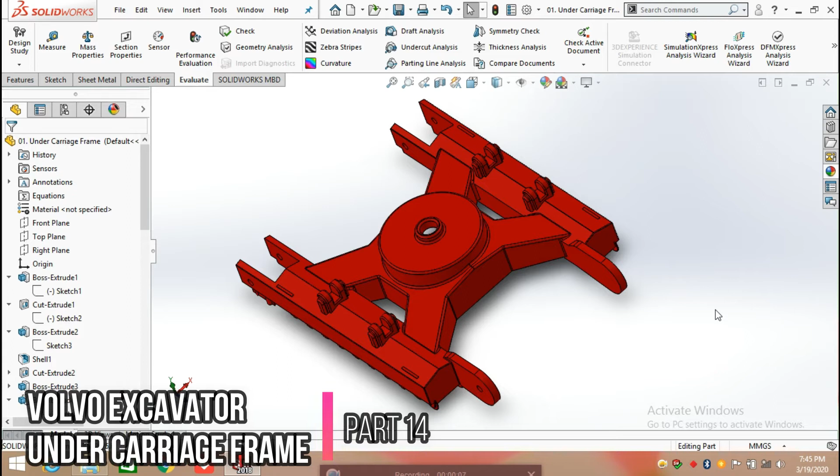Hello everyone, in this video we are going to create the undercarriage frame used in a Volvo excavator. So here I already have created its part. In this video I am going to show you the features used to create this and the sketch of this part. So let's begin with the first one.

The feature is extrude boss. So I am rolling back all the commands and starting from the first one. For this we choose any plane, front plane, top plane or right plane. I am going to create a sketch here.

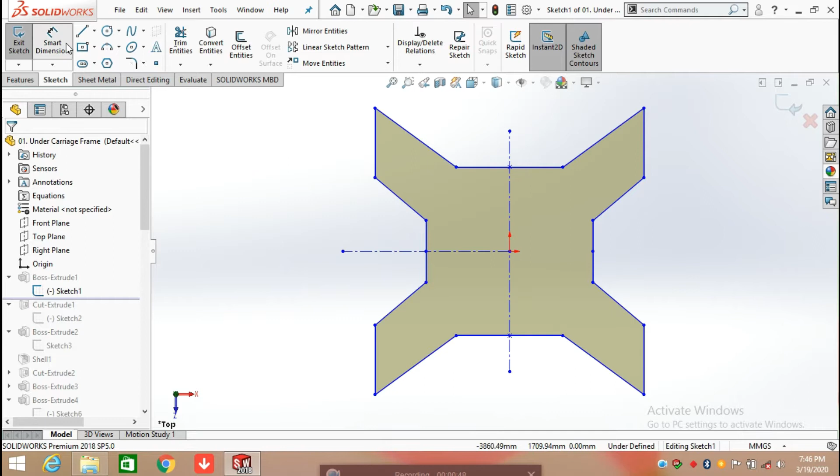First of all, draw a center line from the origin, make it a construction line. After that, draw a center line. Now draw a straight line which has a length of 1150 mm, and add the relation between the line center point and origin, making them vertical.

After that, again draw a line which has a length of 875 mm at an angle. Now defining its angle with the previous line, click on the first line and second line. Now defining its angle, which is 144 degrees.

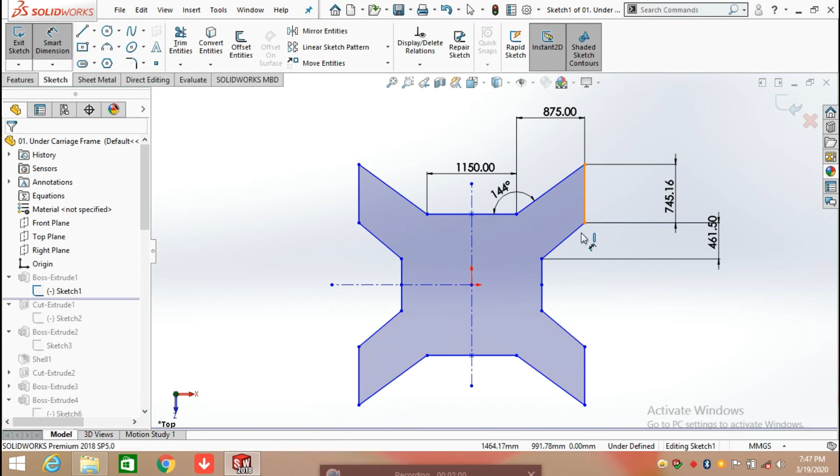Now draw a straight line from this edge which is 745.16 mm, perpendicular to this point. Now again draw a line at an angle which is 461.50 mm. Now defining the angle between these two lines, which is 230 degrees.

Now draw a line perpendicular to the previous line, which is 329.06 mm. After that, we use mirror on this sketch. So click on mirror entities and select these entities, and mirror it above this line to create this half section of the sketch.

After that, one section is completed. Now again click on mirror entities and select these outlines and mirror them above the center construction line, which helps save time in creating the sketch. Now the sketch is completed.

After that, click on feature and select the extrude boss command. Now we are going to extrude boss this sketch. So select blind direction in the upward direction and extrude it up to 610 mm, and click OK.

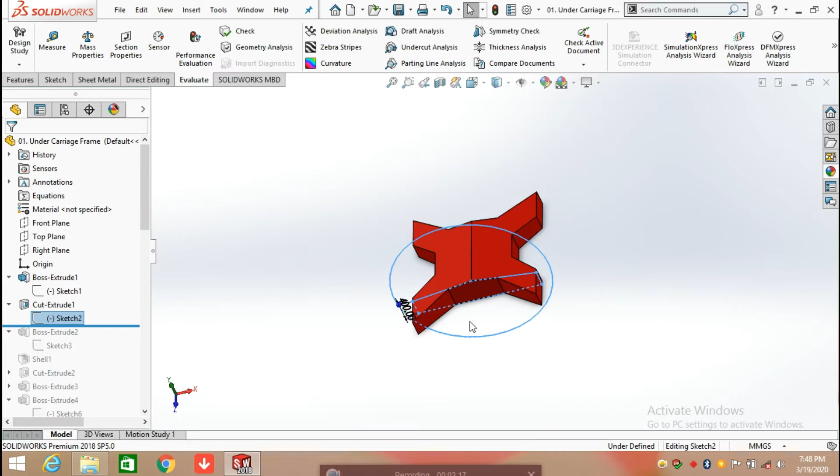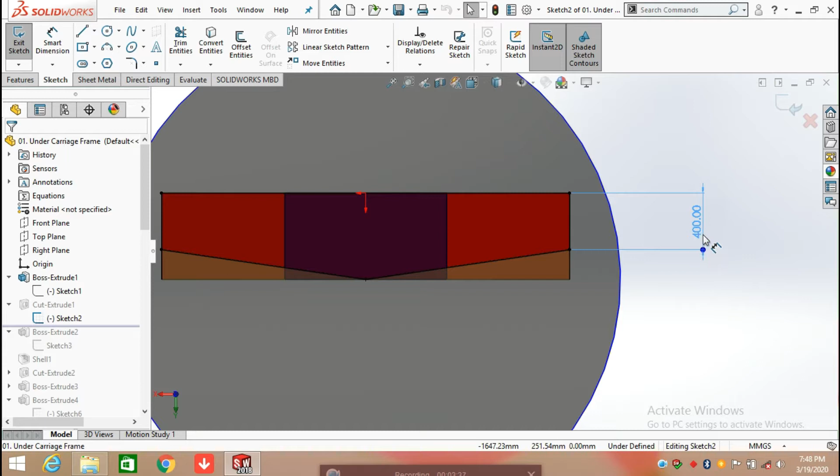Now we are going to apply extrude cut. For this, here again we create a sketch. Okay, so first of all, click on the line command and draw a straight line edge to edge, making a line in the vertical direction which has a length of 400 mm. Now continue with the line command and draw another line.

This line is 1450 mm, and the angle between these two lines is 261.76 degrees. Make the same line in another section, or you can mirror the sketch by drawing the center construction line, selecting mirror entities, and mirroring the half section.

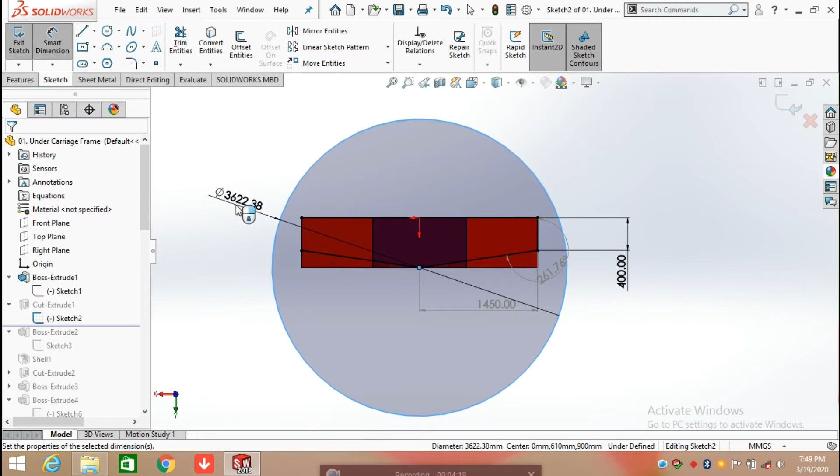After that, draw a circle here, defining its diameter - you can roughly draw a circle. After that, select the extrude cut command. The sketch is created on this plane. For this, you simply need to click on the plane and click on sketch.

Now we are going to apply extrude cut. Click on feature and select the extrude cut command, and here select through in both directions. Select direction 1 and direction 2, and select through all the body. Click OK.

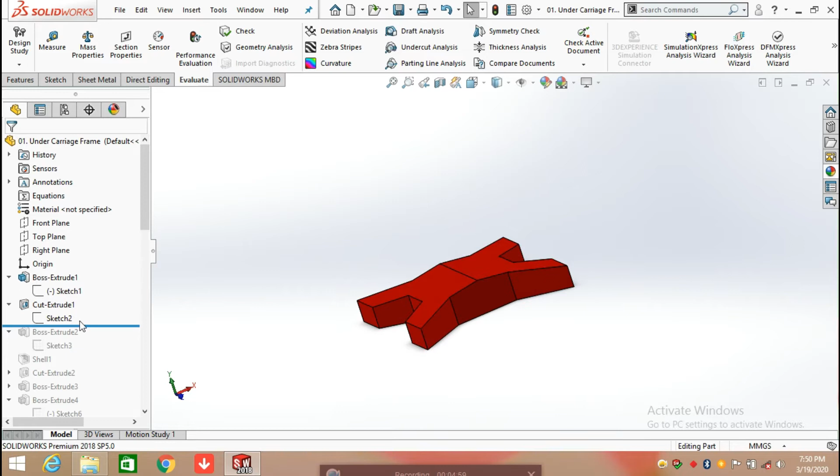After that, we are going to extrude boss. So for this, select this plane, just click on the face, click on sketch, select the circle command, and draw a circle at the origin which has a diameter of 1600 mm.

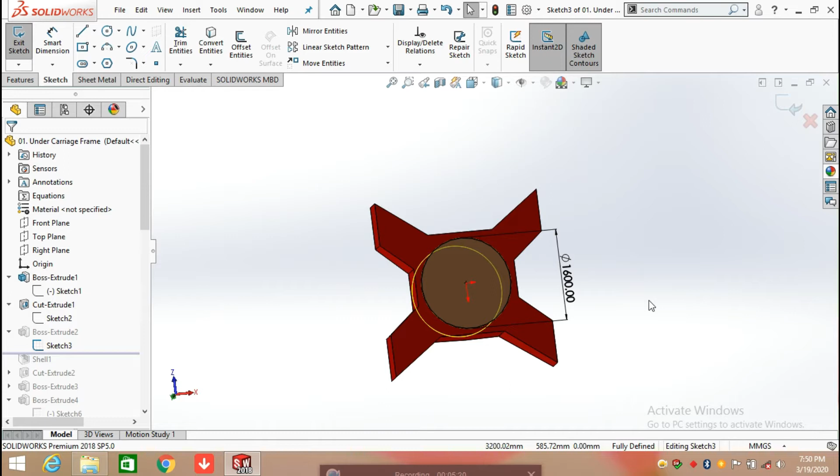After that, click on feature and select extrude boss, and extrude it up to a distance of 830 mm.

Now we need to shell the body, so click on feature and select the shell command. Here we need to select the face, so we select the bottom side and enter the thickness, which is 50 mm. Click show preview - you can see the preview in yellow. Click OK.

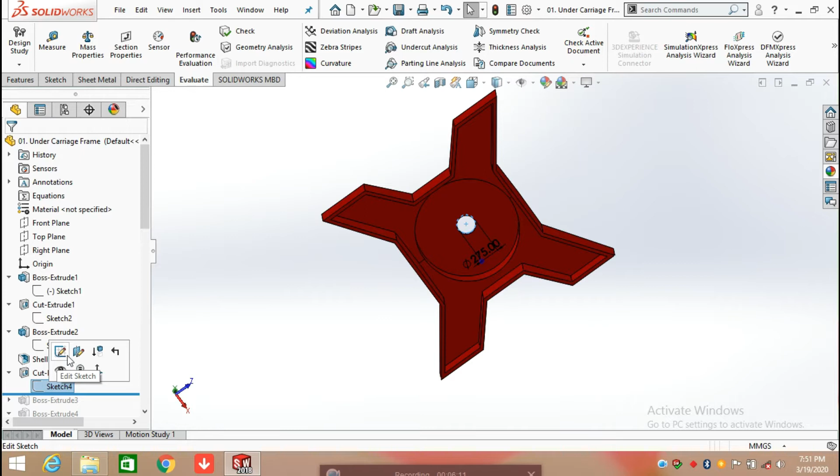After that, again we are going to apply an extrude cut. So for this, draw a circle at the origin which has a diameter of 275 mm, and extrude the cut throughout.

Now again draw a circle at the origin, defining its diameter which is 417 mm, and the inner circle has a diameter of 275 mm. After that, click on feature and again select extrude boss, and extrude it up to 118.50 mm.

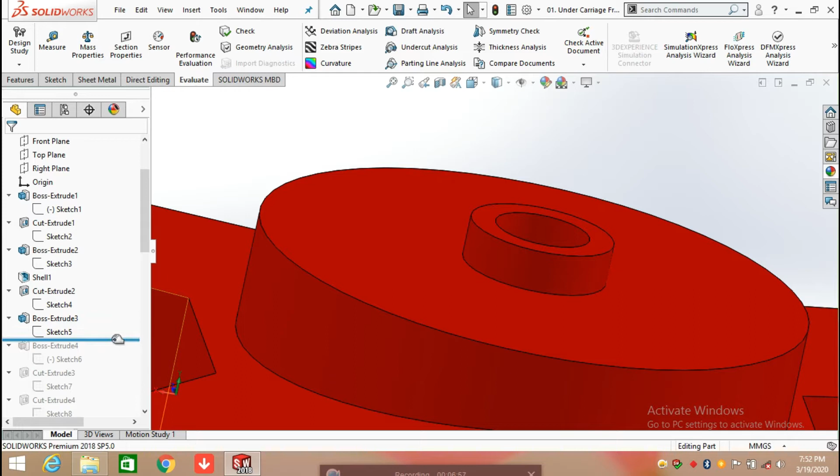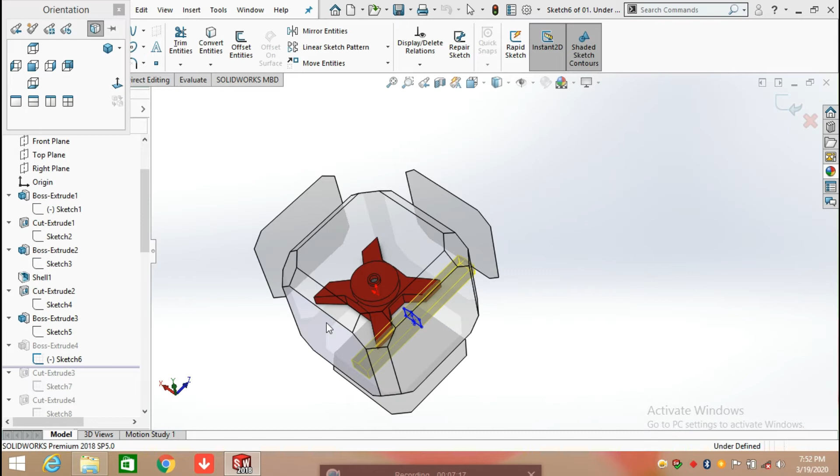Now we are going to again create a sketch here. For this, we need to select the front plane and click on sketch, and here I'm going to create a sketch. First of all, draw a center line and define its distance from the origin, which is 1600 mm. Now simply click on the line command and draw a straight line which is 350 mm.

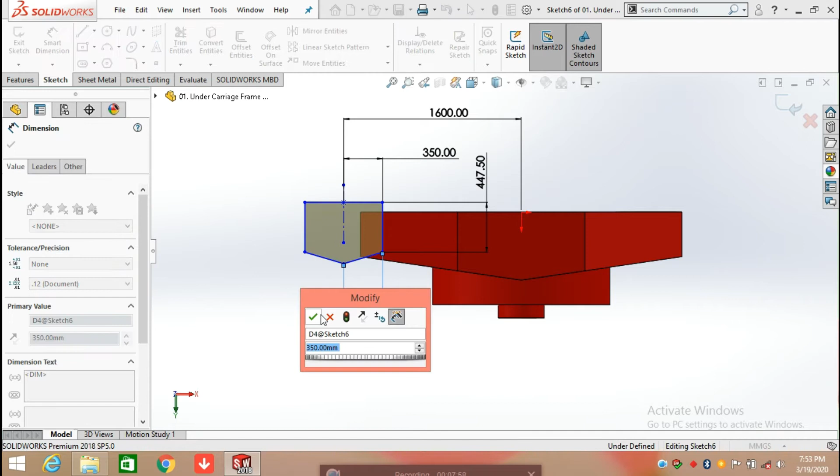Again draw a line perpendicular to it which is 447.50 mm. Now draw a rough sketch, a line having 350 mm. After drawing it, we need to define its angle, so click on the first line and second line and define its angle, which is 253.68 degrees.

After that, again click on mirror command and select the half section and mirror it above the center line, and click OK.

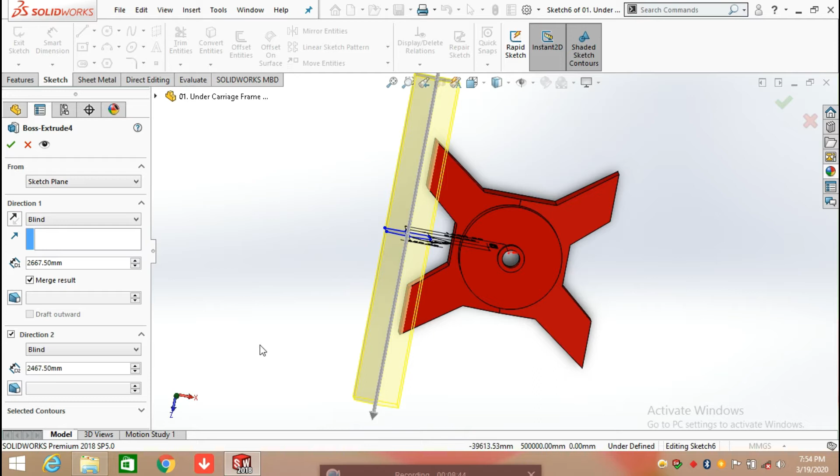Now click on feature and again select extrude boss. Now extrude it from the sketch plane, which is 2667.50, and select direction 2. In direction 2, we extrude it both up to 2467.50 mm. Now click OK.

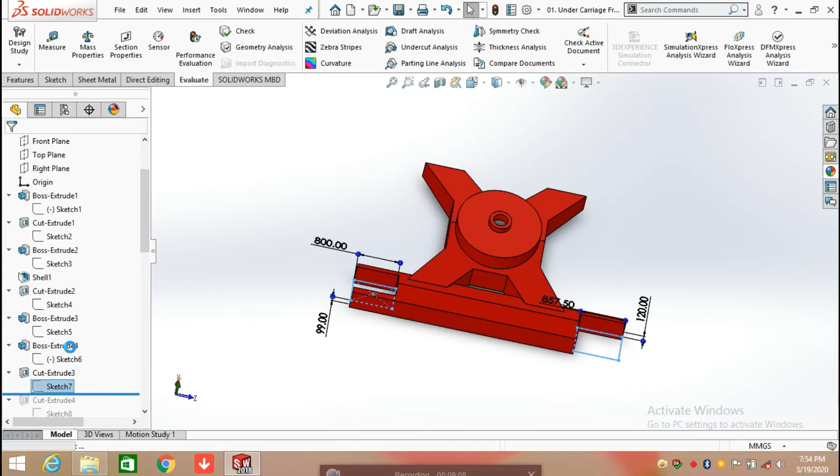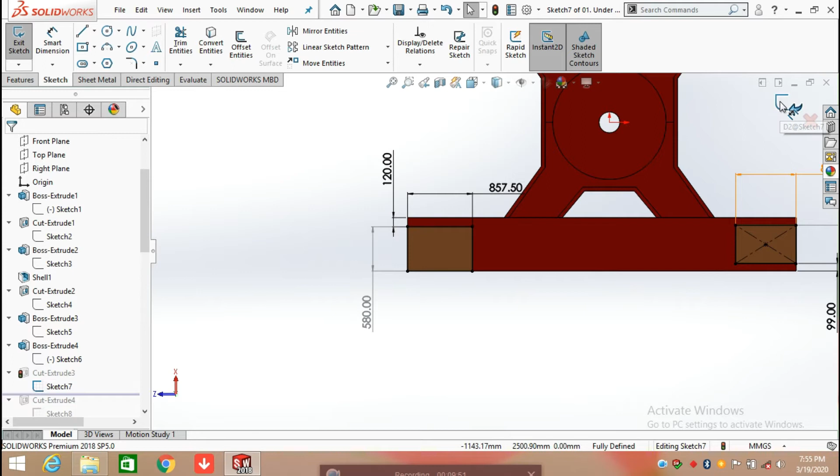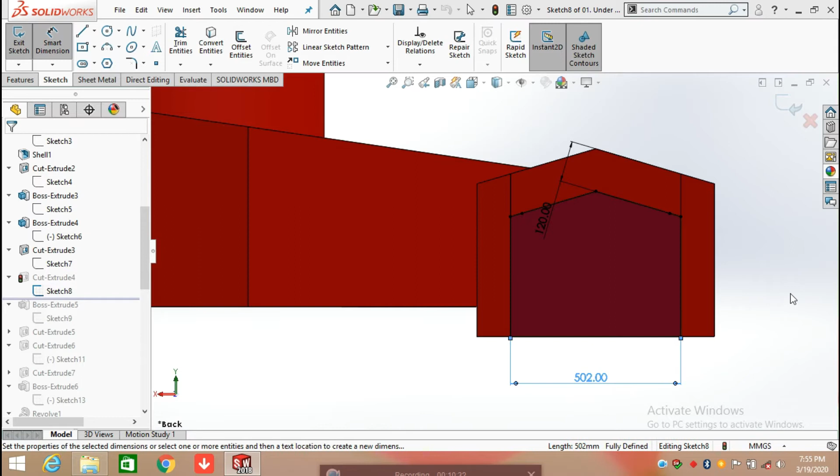Now here we are again going to apply extrude cut. For this, select the face and again click on sketch and simply draw a rough sketch, defining its dimension. This is 502 mm, and after that draw a straight line which is 351.45. Now defining its length from the upper edge, which is 120 mm. Defining the angle between these two lines, which is 253.68 degrees.

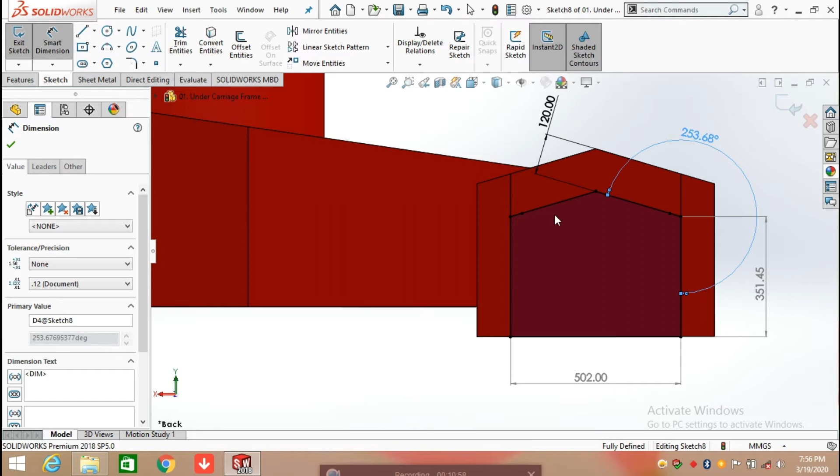Now simply draw a center line on the midpoint, and again click on mirror entities, and from here select entities which you want to mirror. So here I have selected these entities and mirror it above the center construction line. After that, click on extrude cut command and extrude cut.

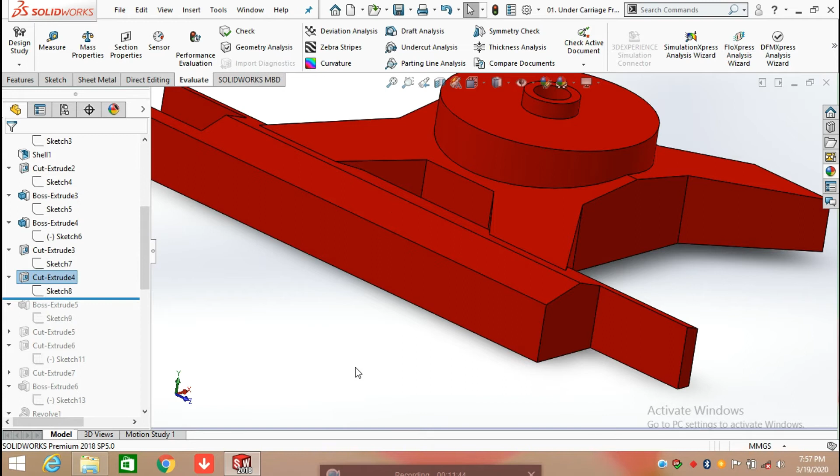Select offset from here, 60 mm offset from this face. After that, again select offset from the surface, so select this one and enter distance 60 mm and click OK. You can check it in evaluate from measure. Click this face and this face, showing thickness is 60 mm on both sides.

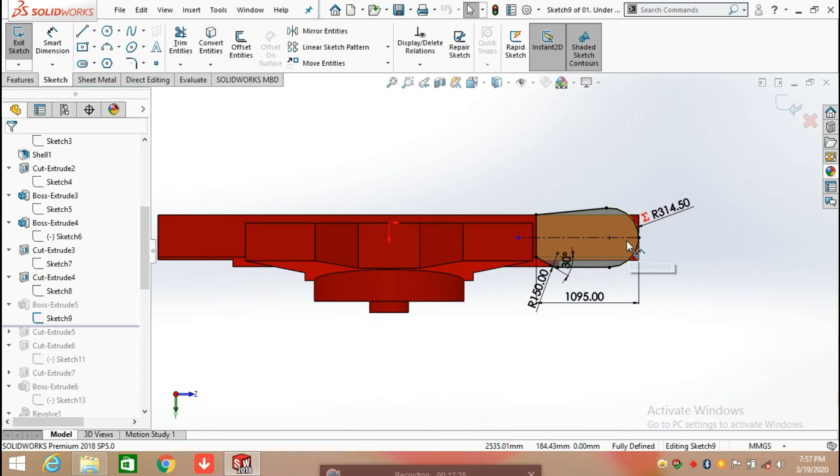Now we are going to make another sketch. For this, click on this one face and click on sketch, and start from the center line. So draw a center line from this edge. With the help of line command, draw the half one sketch. The total length of the line is 1095 mm.

After that, draw a line having length 152.81. Now defining the angle between these two lines, which is 30 degrees. After that, click on arc and draw an arc having radius 150 mm. Now draw a straight line, it is 552.69.

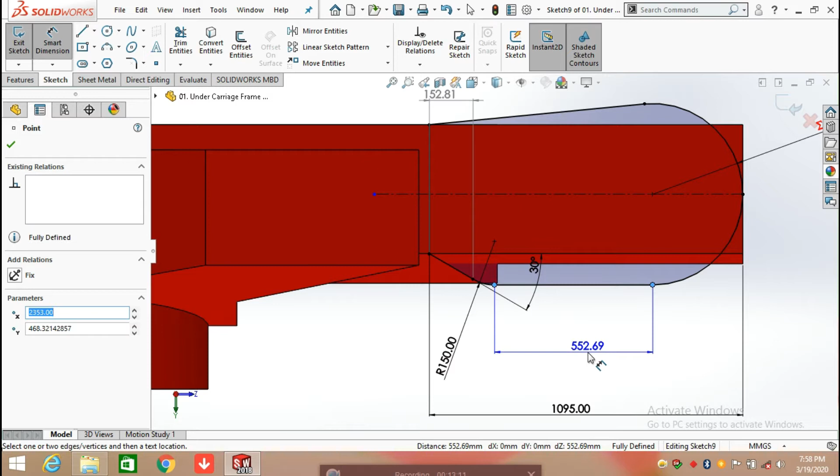Now again select arc and draw an arc here which is 314.50 to this point. Now again click on mirror entities and mirror half the sketch above the center line and click OK. After that, select extrude boss. Now here we select up to surface, so we need to select this face and click OK.

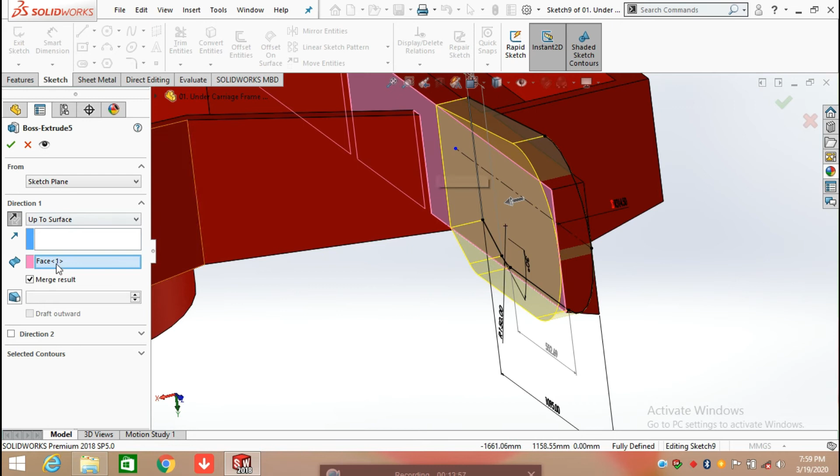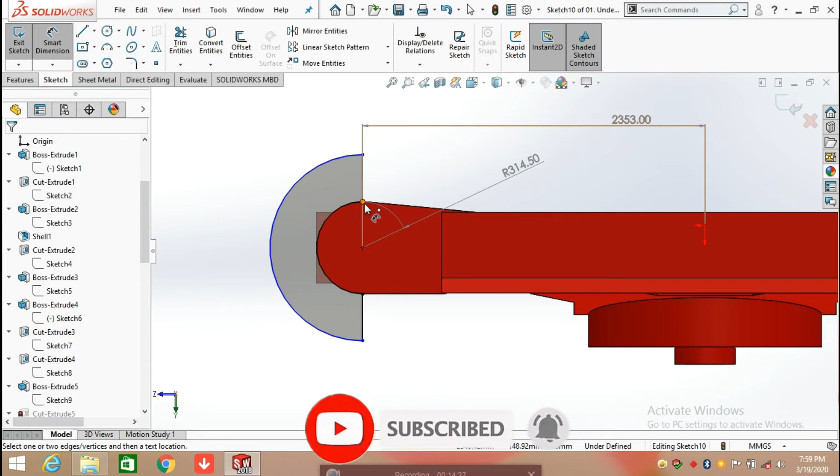Now we are going to extrude cut the extra face from here. For this, click on this face and draw an arc here having radius 314.50. Now defining its distance from the origin, which is 2353 mm. Now draw a straight line from edge, and the outer radius is 634.68 from the same origin. After that, click on feature and extrude cut to all.

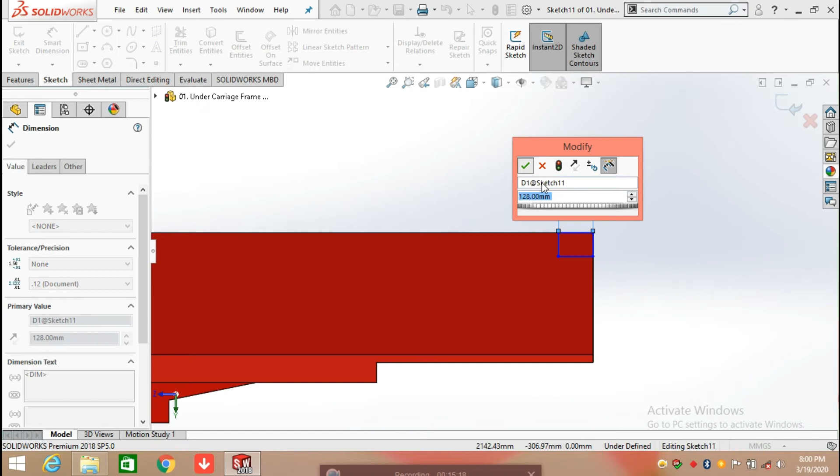Now here we again extrude cut on this face. Select this face and draw a rectangle here from the edge. You can select corner rectangle and simply draw a rectangle here, which is 128 mm, and having width 87.50, and select feature and extrude cut to all the body.

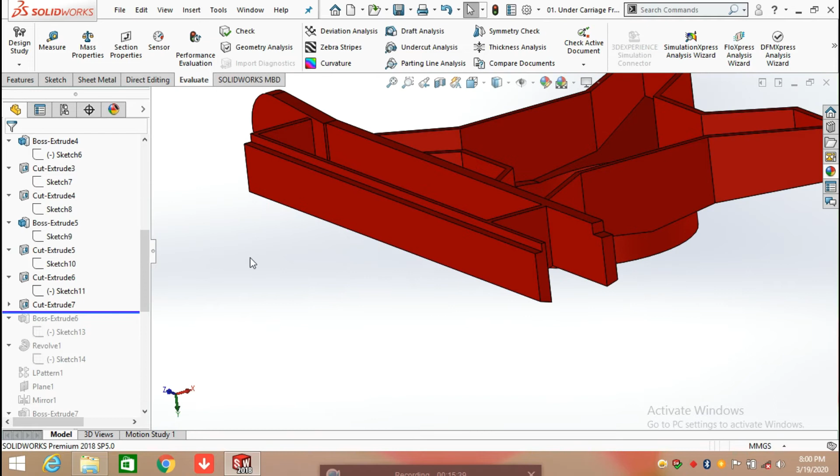Here we again apply extrude cut. For this, select this face and click on sketch. And again draw a corner rectangle, defining its length and width, which is 65 by 65, and extrude cut through all in this direction.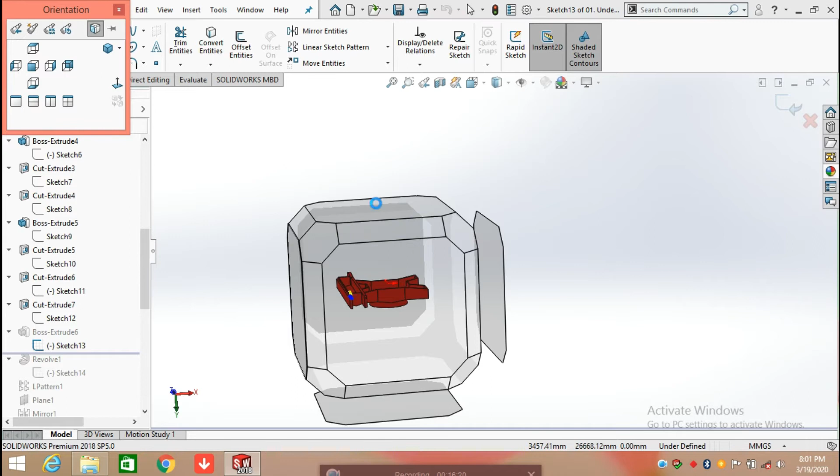Now we are going to extrude boss. For this, click on this face and click on sketch. Now here I am going to define the sketch with the help of Smart Dimension. First of all, simply draw a straight line from reference of this edge. Now defining the distance from the edge, which is 100 mm. Now defining the length of this line, that is 339.20 mm.

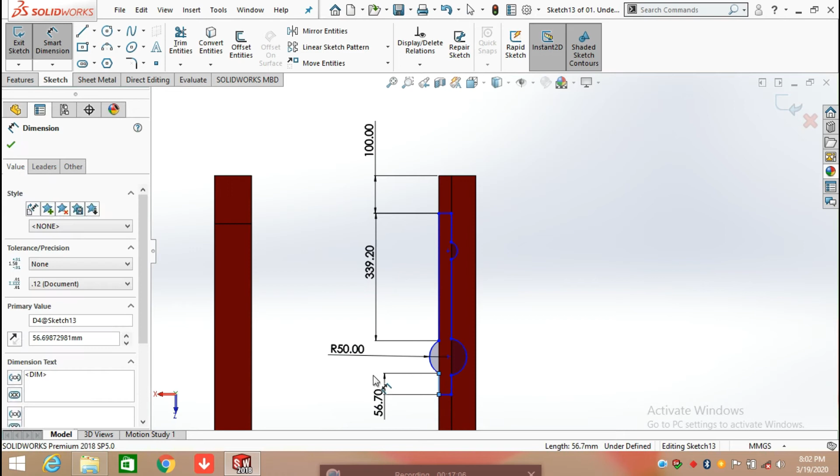Now select arc command and draw an arc here having radius 50 mm. Continue with the line command, draw a line with the reference of this edge of the body, it is 56.70. Again draw a line perpendicular to it, which is 34 mm. Again draw a straight line, which is 50.82.

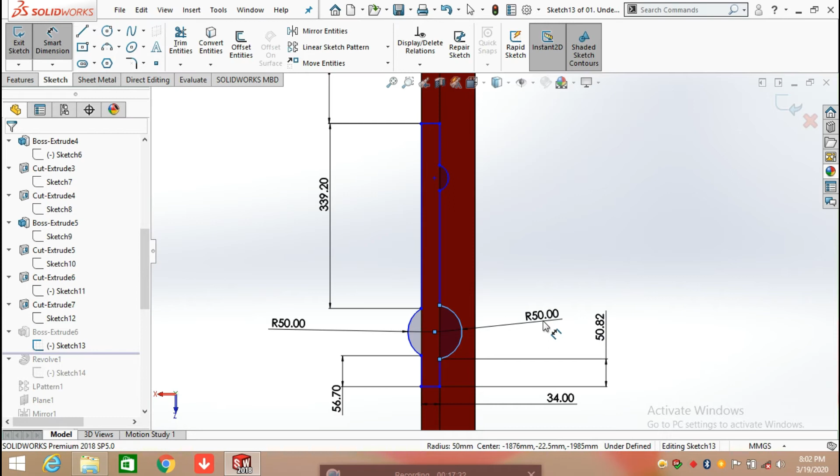Now again click on arc command and again draw an arc here, defining the radius, which is 50 mm. Now draw a straight line from this point, this is 209.99, approx 210 mm. Again click on arc command and draw an arc here having radius 35 mm. Now close this sketch with the help of line command. This is 76.88 mm.

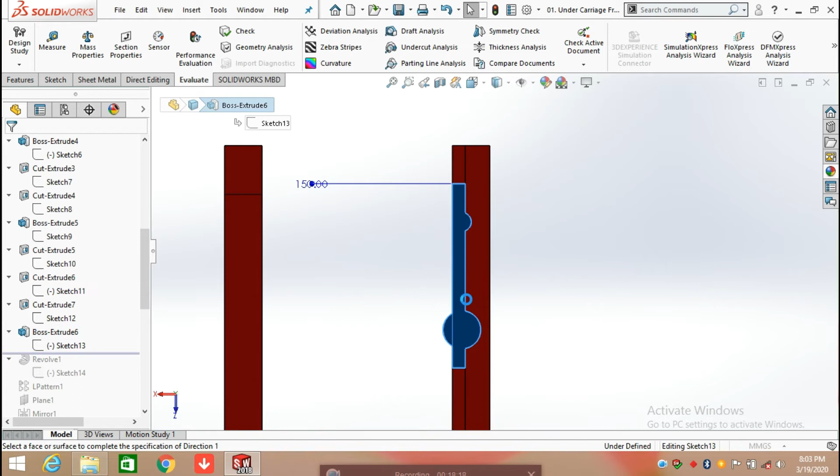Defining the width of this line, which is 34 mm. After that, click on feature and select extrude boss command and extrude it both. From here we select offset from the surface and selecting this one face, and enter distance 150 mm and select reverse offset and click OK.

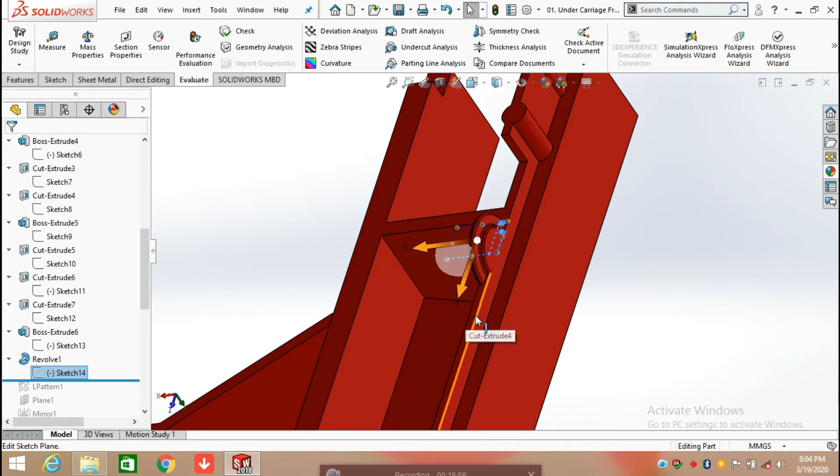Now we are here to apply revolve base command. For this we need to create the sketch on this face. So select this face, keep it in normal position, and click on sketch.

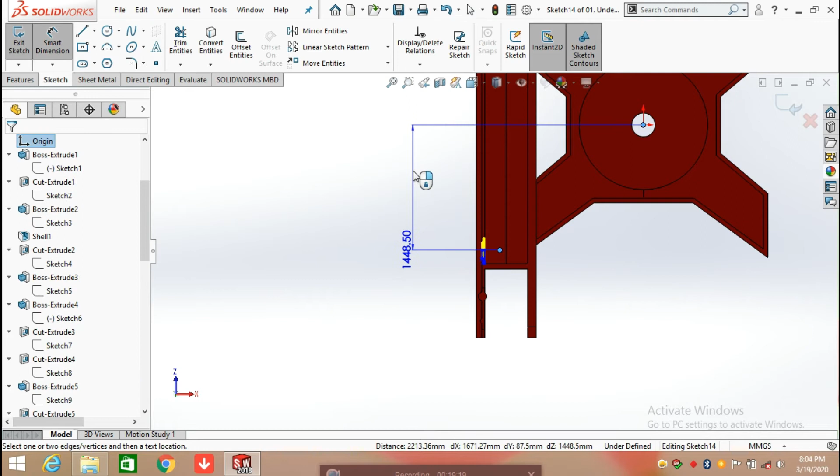Draw a sketch here. First select the line command and select construction line, defining the distance of this construction line from the center of the origin, which is 1448.50 mm. Now defining another dimension, draw a straight line having length 142 mm.

Now select arc command and draw an arc having radius value 8 mm, and draw a straight line from the end point of the arc, which is 3.50 mm, and make this line tangent to the arc.

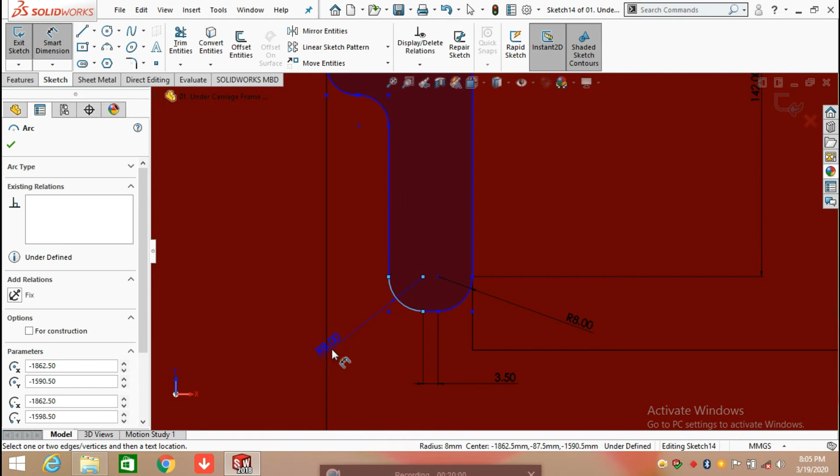Continue with the arc command, again draw an arc which is 8 mm. Now draw a straight line that is 35 mm.

Again select arc command and draw an arc here, having 7 mm radius. After that, draw a little line which is 0.50 mm.

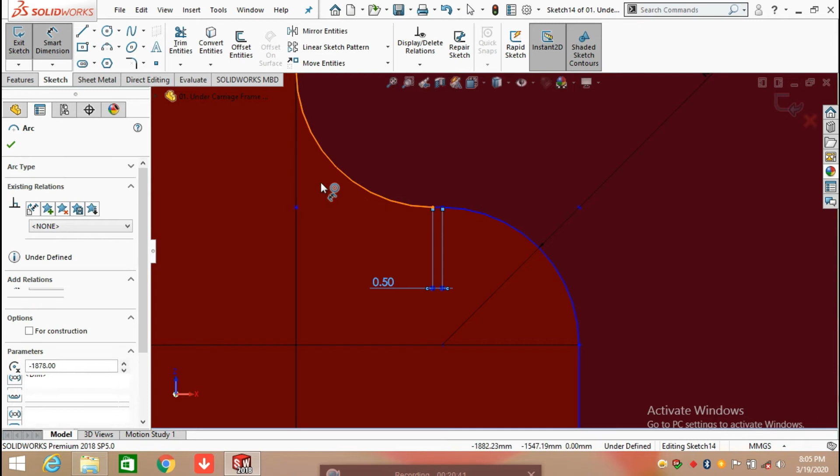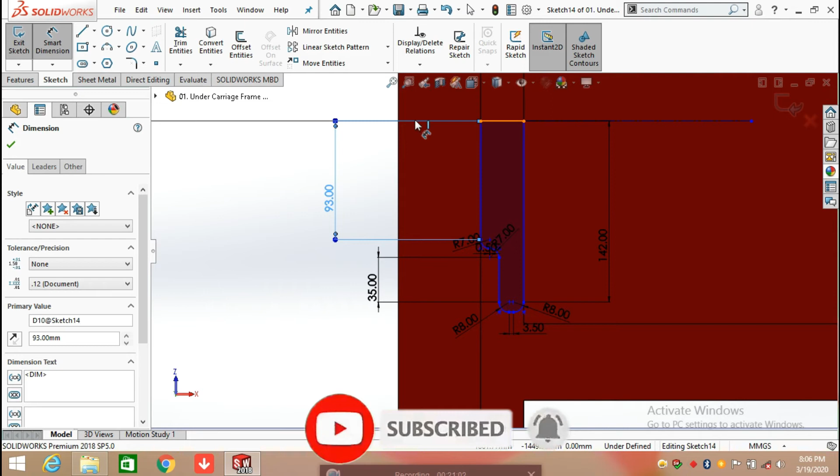Again click on arc command and draw an arc here which is 7 mm. Now close this sketch with the help of line command, that is 93 mm, and click OK. Now defining the width of this line which is 3.50 mm.

After that, click on feature and select revolved boss/base and revolve this sketch with reference of the center line. You can check it from here. Now I'm going to revolve this sketch with the reference of this construction line and click OK after 360 degree.

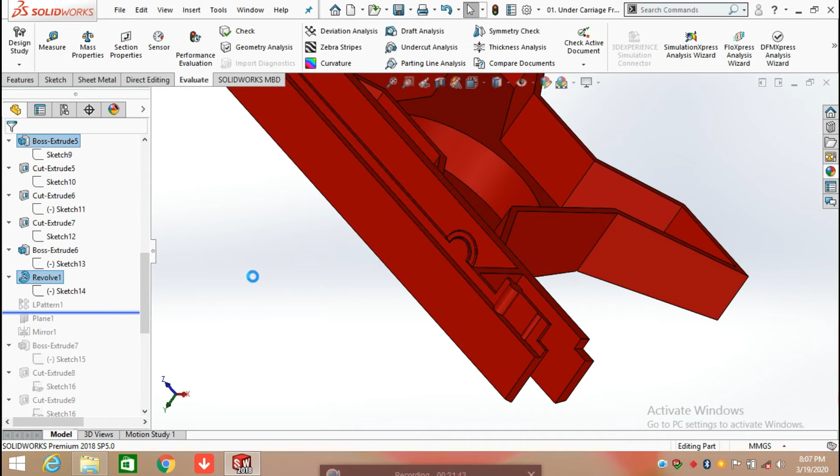Now we are going to pattern it. Click on feature and select linear pattern. Select the features or faces which you want to pattern. Here we select revolve, and for direction we select this one edge. Now number of items here is 10, and distance between each is 350 mm. After that, click OK.

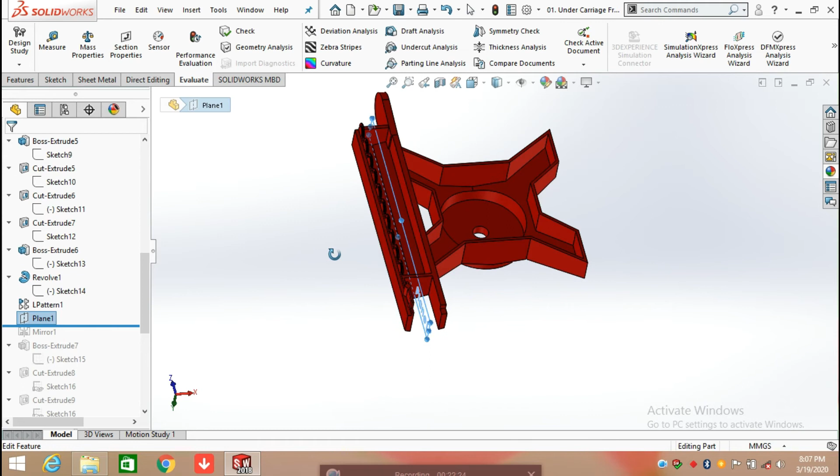Now here we need to choose a plane. Click on feature and select reference geometry. Here we are creating the plane between these two faces, so select first face and second face, and the plane is created here.

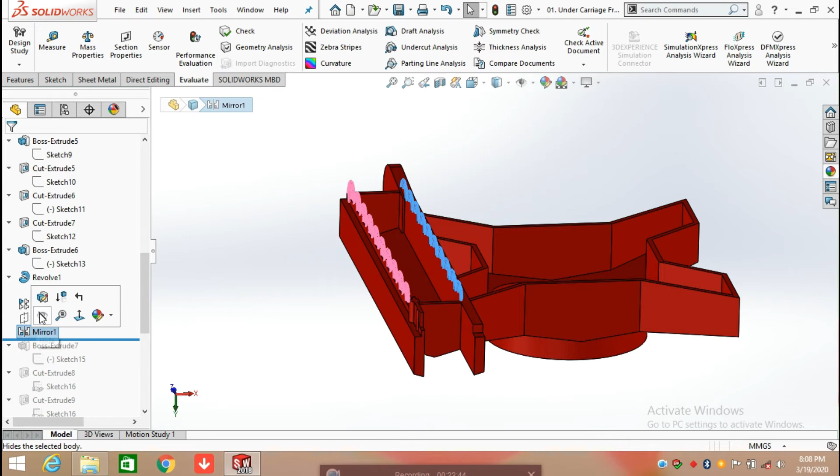Now we are going to mirror the linear pattern. Click on feature and select mirror command and select the feature which we want to mirror. Select linear pattern and revolve, and the face or plane which you want to mirror about. So select plane 1 and mirror it about plane 1. Click OK.

Now we are going to extrude boss again, this one part. So select front plane again, and I'm going to create a sketch here. Keep this sketch in normal position and start from the center line.

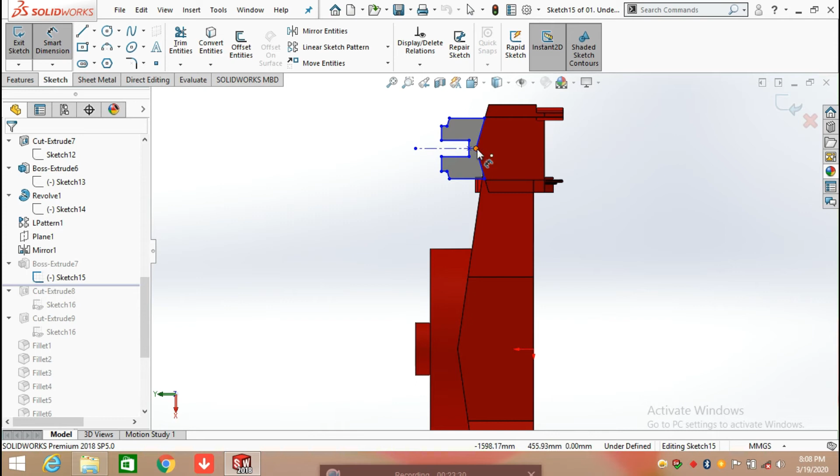After that, draw a line with reference to the edge of the body, having length 241.50 mm. Now draw a straight line from the end point of this line, which is 284.51 mm. Now again draw a line having length 60.50 mm.

Now defining the angle between these two lines, click on first line and second line, which is 253.68 degree.

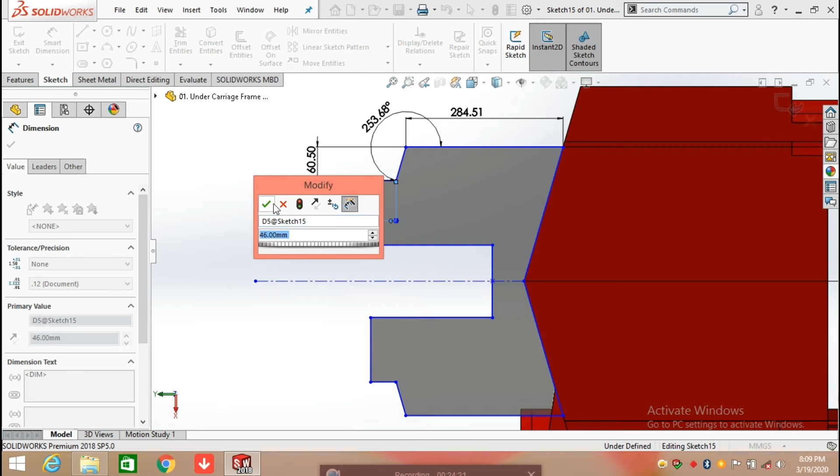Now draw a straight line, which is 46 mm. Again draw a line here, which is 116 mm, and click OK.

Continue with the line command. Again draw a line perpendicular to it, which is 220 mm. And join this line with the center line, which is 65 mm.

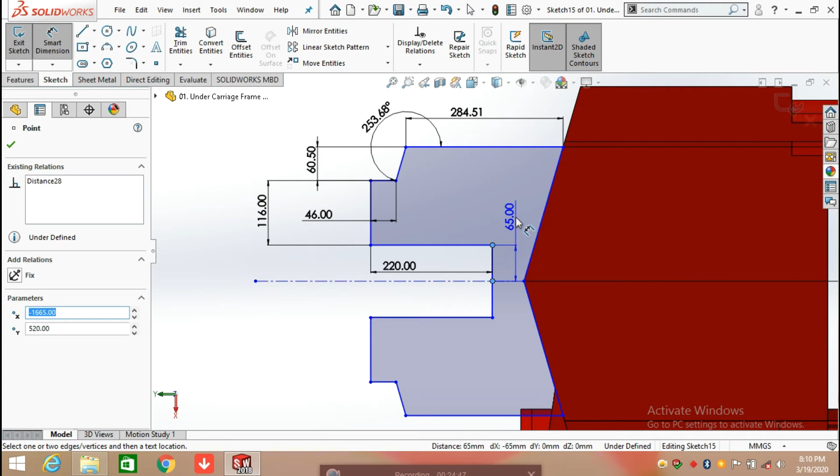Now again click on mirror entities and select all these entities and mirror it about the center construction line, and click OK. After that, click on feature and select extrude boss command. Select offset here and offset it 460 mm, and for that select direction blind, which is 233 mm, and click OK.

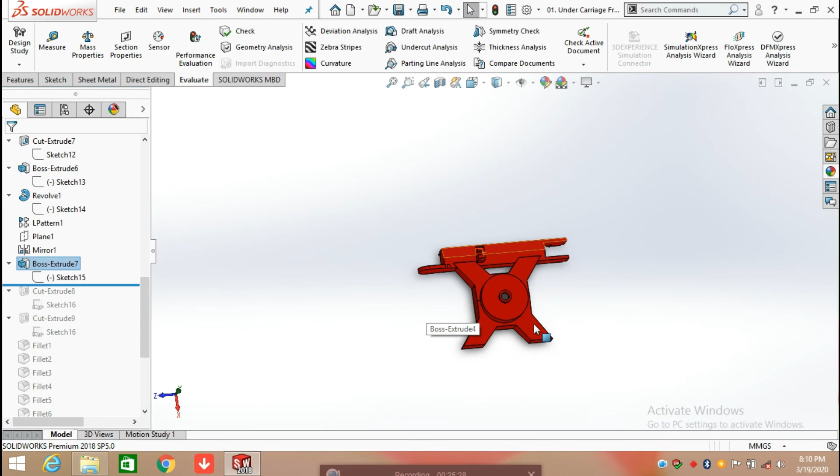Now here we again go to extrude cut. So for this, select this face, and here we are going to draw a sketch.

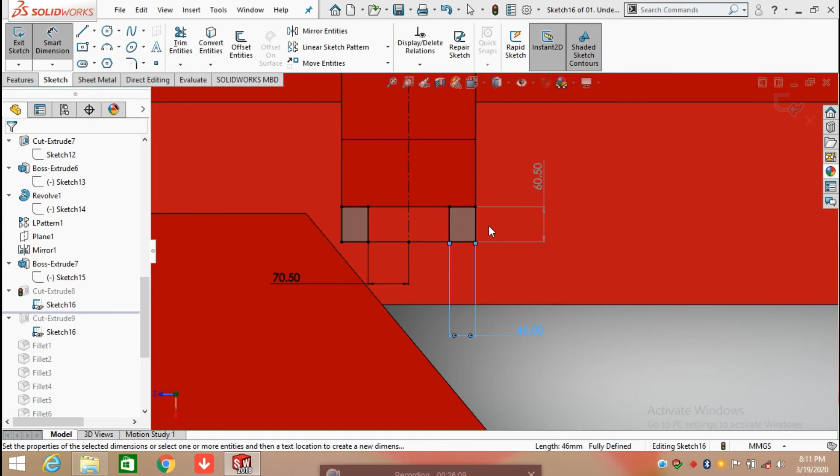Simply draw a rectangle and draw a center line from this point. Now defining the length and width of this corner rectangle, which is 60.50 mm. Now defining its width, which is 46 mm. Same in another direction, 46 mm and 60.50 mm.

Again select mirror entities and select both these two corner rectangles and mirror them about the center construction line. Now click on feature and select extrude cut.

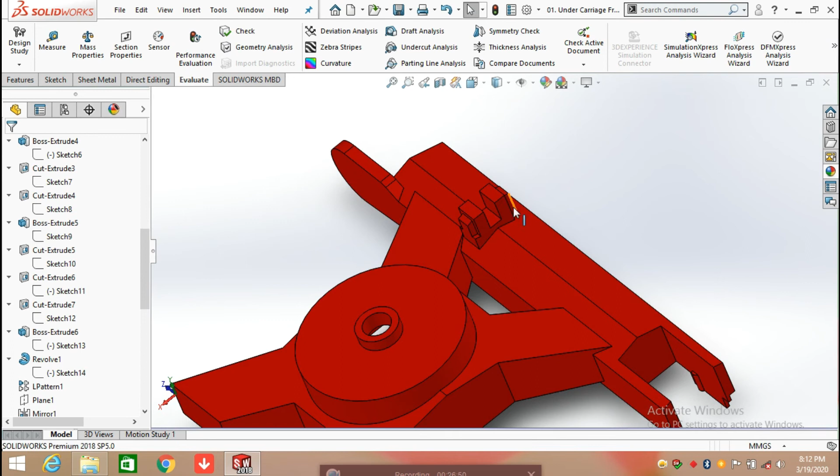From here we need to select up to surface. So for this we select this face and click OK. Now the extrude cut is applied up to this one surface.

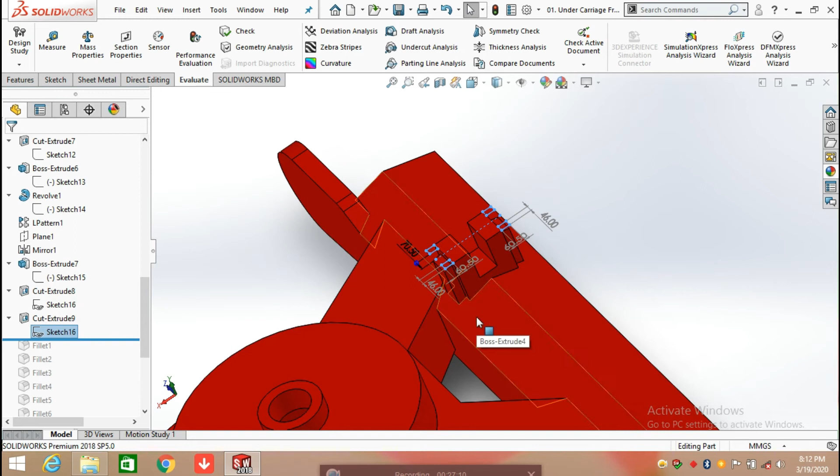Now again apply extrude cut, and this one we need again select up to surface and select this surface and extrude, cutting this sketch up to the surface.

Now we are going to apply fillets on these edges. Click on feature and select fillet command.

Here we apply face fillet. For face fillet we need to select three faces. So we select the first face and click, select the second face and click, and select the third face, and a full round fillet is applied. Click OK.

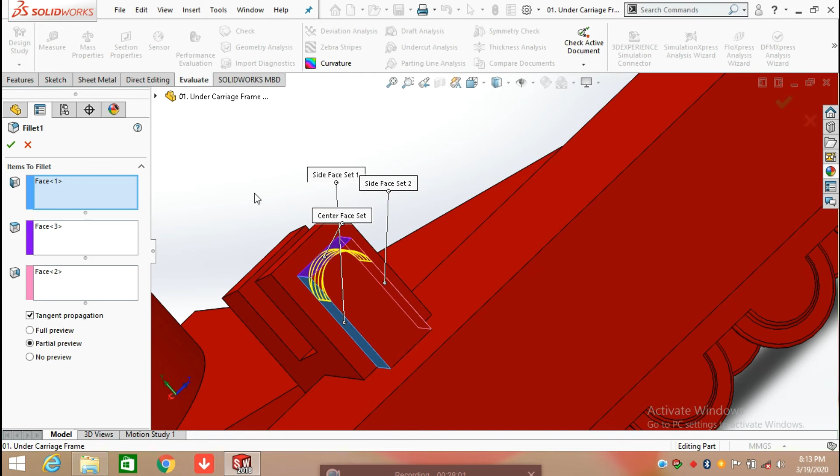Now getting the fillet command again. Again here we apply face fillet, so we need to select three faces simultaneously one by one and click OK. Repeating this command on these two edges again by applying face fillet.

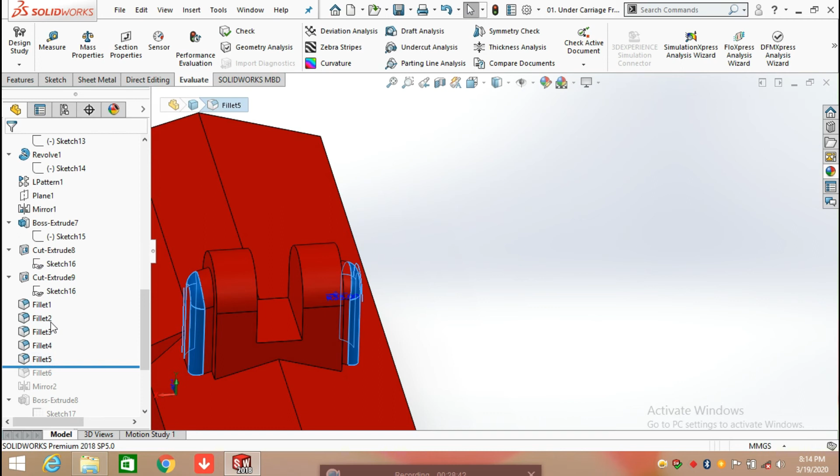Now again select fillet command. Here we apply edge fillet, which is having radius value 35 mm. So select the outer edges and click OK. You can see the changes here.

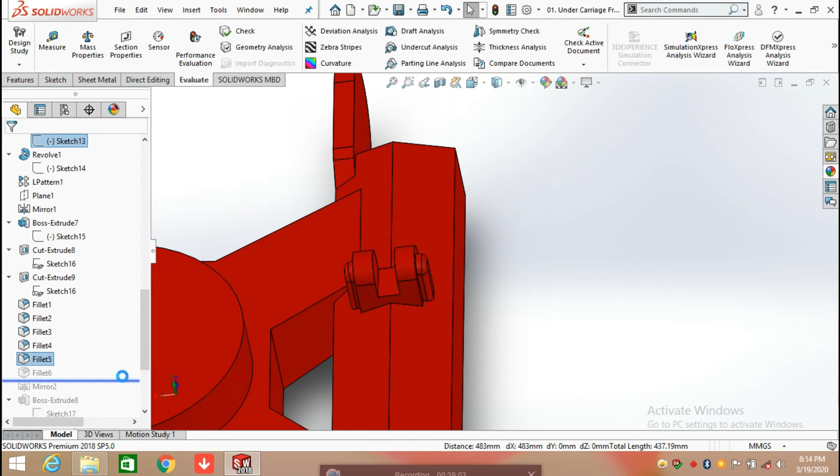Now again click on fillet command. The edges are shown here in blue color, and yellow color are the selected edges. Here we need to select 8 edges, which have a radius value of 20 mm. So select this one edge and the inner edge, and click OK. You can see the changes here. The fillet is applied on these edges having radius value 20 mm.

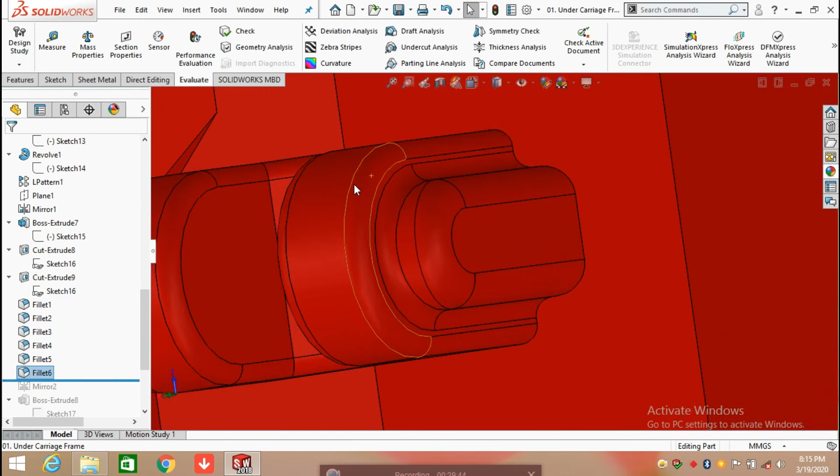Here again we are going to extrude boss.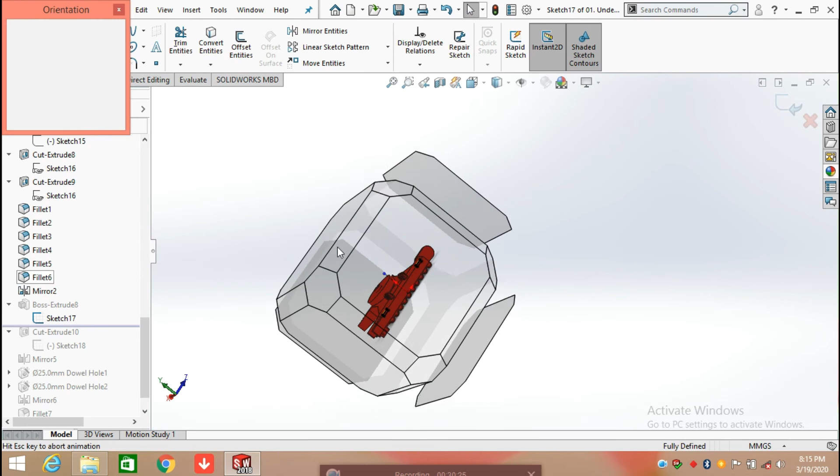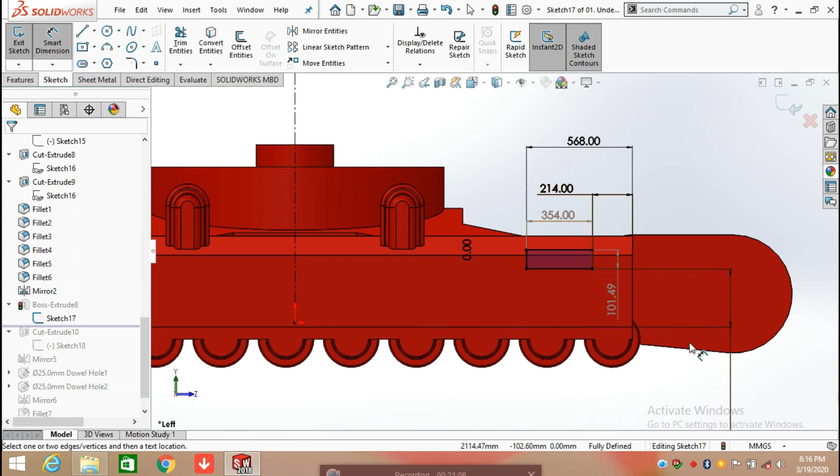Select the face and again draw a rectangle here, which has total length... click on smart dimension, defining length and width, which is 354 mm. Now defining its width, which is 101.49 mm. Now defining its distance from the edge, which is 214 mm, and from this side, which is 568 mm, and draw a center line from the origin and mirror the sketch. After that, click on feature and select extrude boss.

From here, select offset and make it offset at the distance of 59.50 mm from this face, and in direction 1 select up to next and click OK.

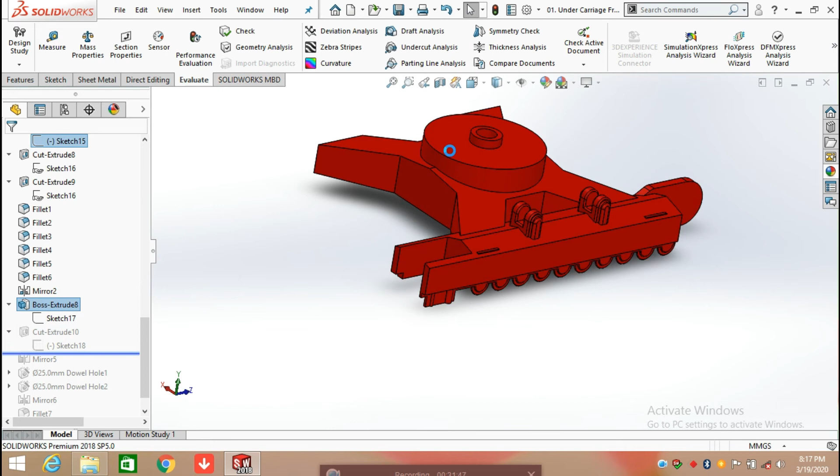Now we are going to extrude cut this one with reference to the front plane. So draw a rectangle on the front plane, and after that select extrude cut and extrude cut the remaining part of this body.

Now we are going to mirror the half one. So click on feature and select mirror, and mirror it about the front plane.

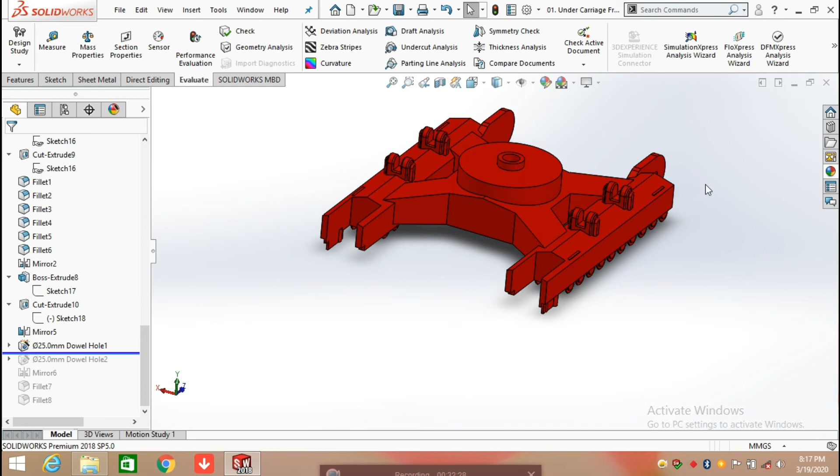Now we are going to produce a hole. The first hole is created here. So go to insert, in the search command you can type hole, and here you see the hole wizard. Select hole wizard.

In the hole wizard you need to select the position of the hole. Here we select standard ISO, or a number of standards are given here as per the requirement. Now select the type of hole, which is dowel hole.

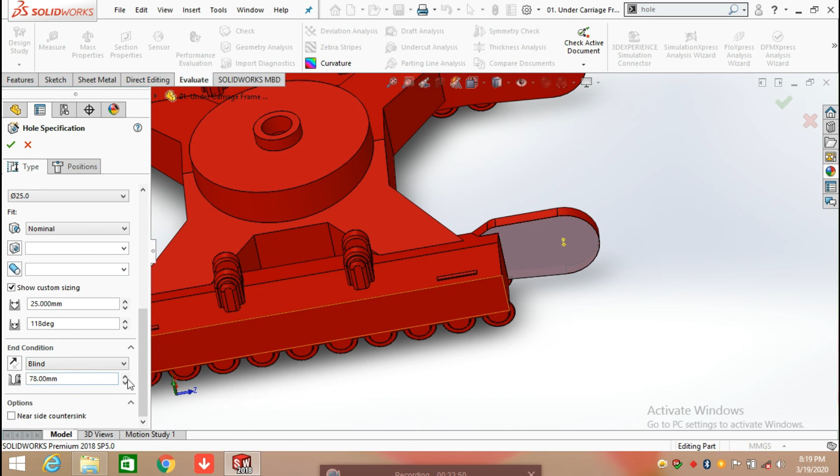After that we need to define the size. So here we select 25. Now fit type, which is nominal. After that click on show custom sizing. So here we enter its width, which is 25 mm, and degree, which is 118 degrees. After that select end condition. End condition is blind and taper at 78 mm, and click OK.

So for making its position, simply click on sketch and select a point, and you can make any point on the face. You can see here a point is created.

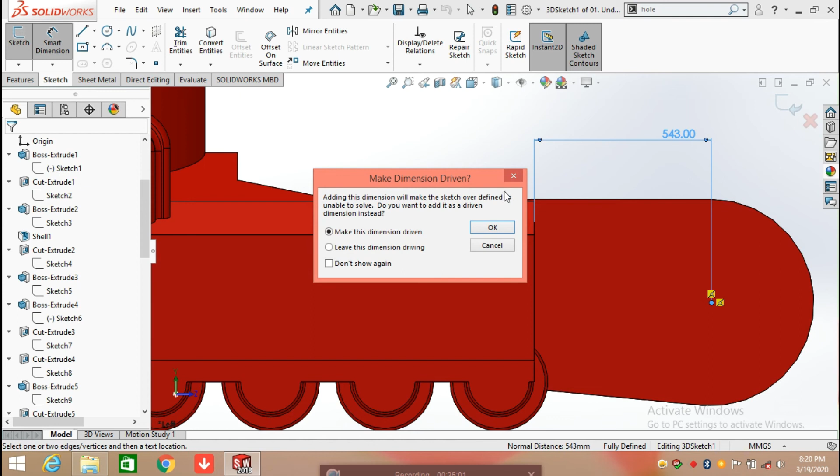Defining its distance from this point. This is sketch in normal position. Click on smart dimension and select the origin. Select the edge and select the point. It is 543 mm. Now defining its height from the top face, which is 384.94.

Select Hole Wizard and make another hole. Repeating the command again. Select Hole Wizard.

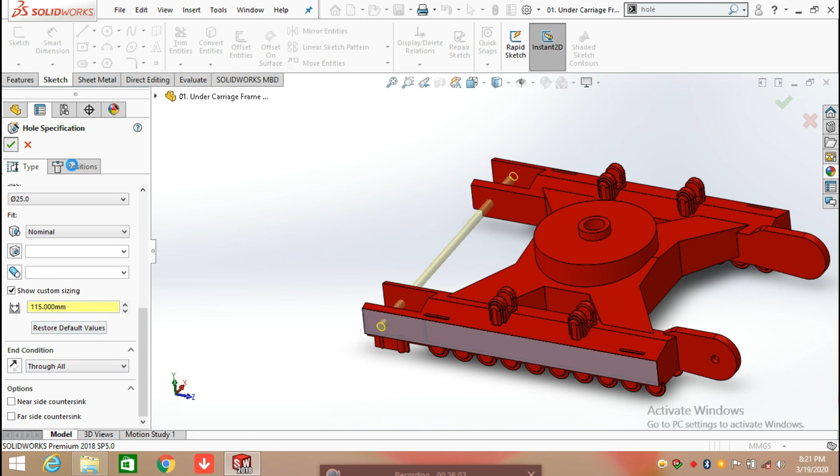Dowel holes, select size 25 mm. After that, click on show custom sizing and set 115 mm. End condition, select through all. Now here the hole is created, which has a diameter of 25 mm.

Click on sketch and you can make a point here for the position of the hole, that is 250 mm and 150 mm from the edges.

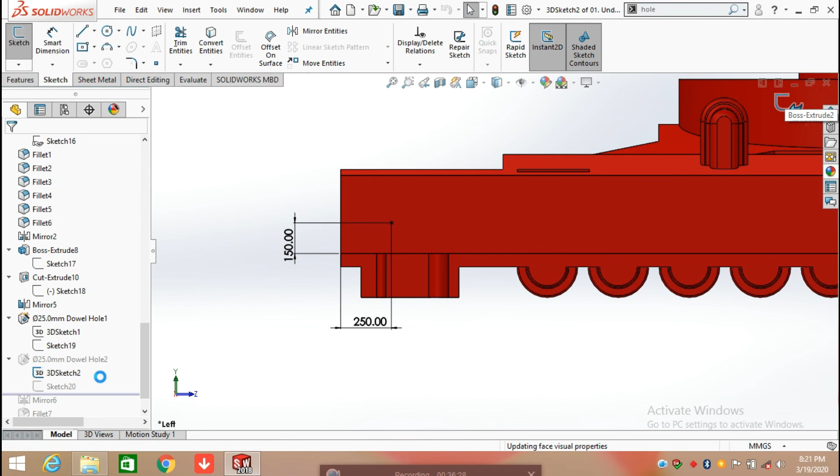Now we are going to mirror the hole. So select the mirror command and select the feature which you want to mirror. So here we select the first one, dowel hole, and mirror it about the center plane.

After that, we apply fillet. Click on feature and select fillet command, and here a number of edges are selected.

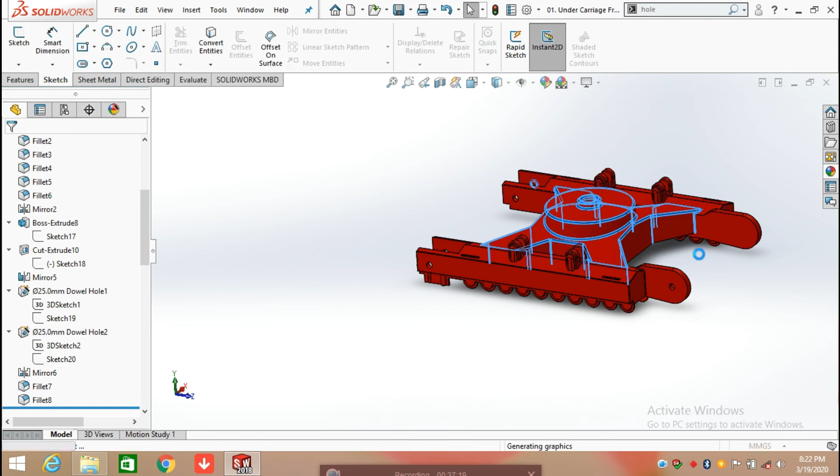First of all, select the outer edges which are shown in blue color, and select the edges. Going through the edges which are selected and the select command. You can see here all the edges are selected one by one.

At the end, we need to select the faces, face 1, face 2 and face 3. So here we select face 1, face 2 and face 3 and click OK. You can also select the edges if you don't want to select the faces. And the fillet is applied on the whole edges and the faces, which have a radius value.

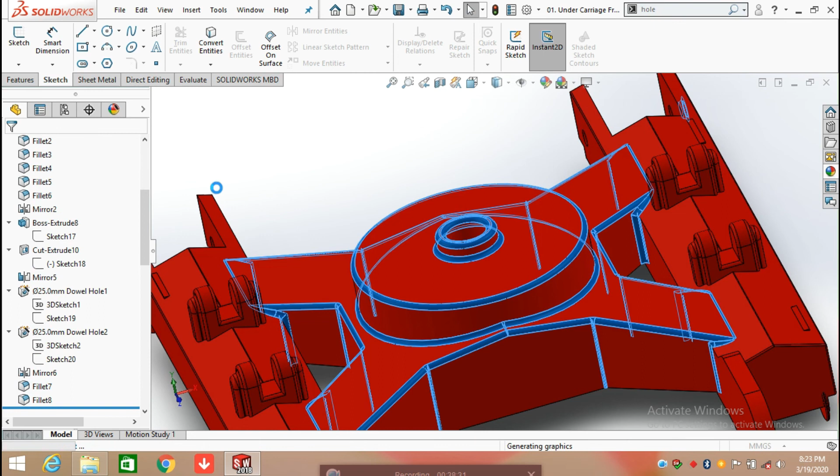Again click on fillet and select. Enter 30 mm and apply the fillet on all the edges and these three faces, and click OK.

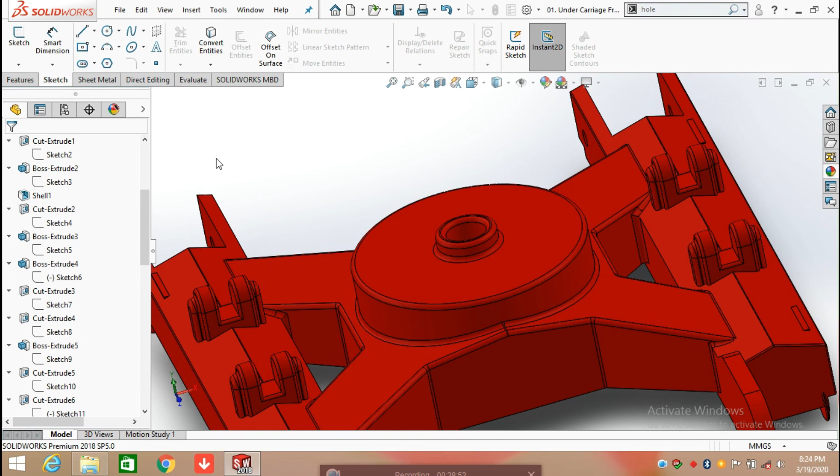You can see the changes here. The fillet is applied on all the edges.

Again click on fillet command and select outer edges of the extrude boss, the blue color showing the selected edges for this fillet. You can see here the edges on which we applied the fillet command on both sides.

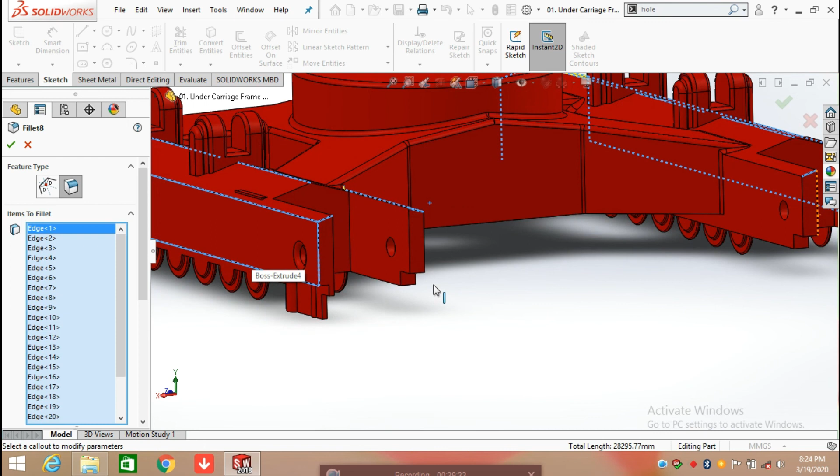Having radius value 10 mm. After selecting all these edges, here 25 edges are selected for this command and click OK.

Now the undercarriage is ready for the use of the whole excavator.